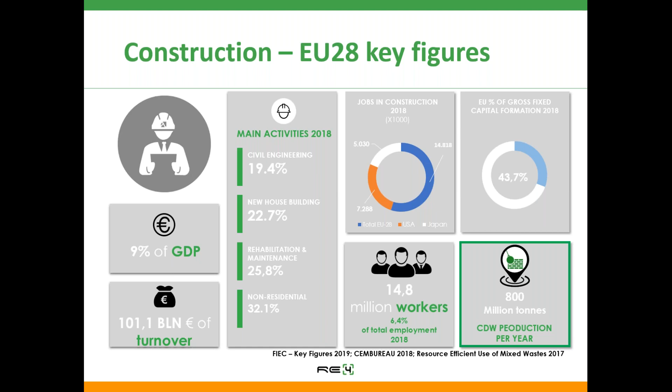However, construction industry is also responsible for the main waste streams at the European level, which is construction demolition waste, which account for more or less 800 million tons per year. The interesting point is that quite a lot of those construction demolition waste can be recycled in high-grade application, but they are very often confined to low-grade application or landfilled. Moreover, there are other materials from construction demolition waste, which are wood, plastics, and glass, with a very high recycling potential that is, however, unexploited so far.

That's why in this scenario, Europe has set the challenge of the development of energy-efficient building concept using new or adapted prefabricated components, allowing the reuse and the recycling of different materials and structure while reducing energy use and minimizing environmental impacts. And Europe also set the targets of a minimum share of recycled materials in the final product of at least 10 to 15%.

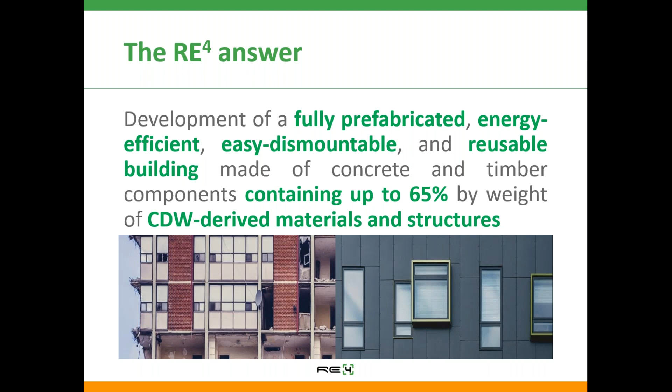And this challenge was taken up by the RE4 project, which has developed a fully prefabricated, energy-efficient, easy dismountable and reusable building made of concrete and timber components containing up to 65% by weight of CDW-derived material and structures.

And to reach this goal, we gathered a multidisciplinary consortium coordinated by CETMA and made of 13 partners from 7 different countries across Europe and 1 non-EU country, comprising 5 among university and research centers, 7 industrial partners, and 1 association. The project has an overall budget of about 5 million euros, and it started in September 2016, and it will end in February 2020.

While moving on the RE4 concept, there are 4 main pillars supporting the project. The first 2 are technical and refer to the maximization of CDW recycling and reuse.

In terms of recycling, RE4 has developed advanced CDW sorting technologies to improve the overall quality of the CDW-derived products, as one of the main constraints for growth is the quality, which is not always good enough when compared to virgin materials. At the same time, RE4 has also fully exploited the recycled potential of lightweight fraction from construction demolition waste, which is currently unexploited.

This process has been supported by the compliance assessment of each sorted fraction against relevant national and European specifications, with the definition of new quality classes for CDW-derived aggregates, with the aim to support the development of new standards in the fields of construction demolition waste.

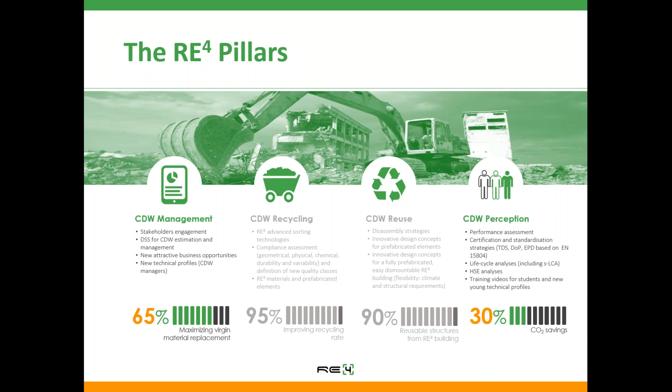Well, let's now see a brief overview of the main results obtained so far by the project, and to each result we have devoted specific presentation both today or in the forthcoming webinar sessions.

So is it possible to build a fully recycled house? The RE4 project answered yes. Nevertheless, it is crucial to adopt a circular approach and to address all the main steps of the construction process.

That's why the RE4 project has developed solutions in terms of design for reusable buildings, construction strategies, CDW sorting, CDW quality assessment, development of materials and prefabricated components incorporating a high ratio of CDW, and a digital tool to support all the actors of the CDW management.

All of the RE4 solutions have been demonstrated and validated in real environments in 4 RE4 demo buildings. Here you can see in the right picture the Spanish RE4 demo building, a 2-story building made of prefabricated concrete and timber components, fully reusable with a replacement rate of virgin materials in the range of 50 to 85%.

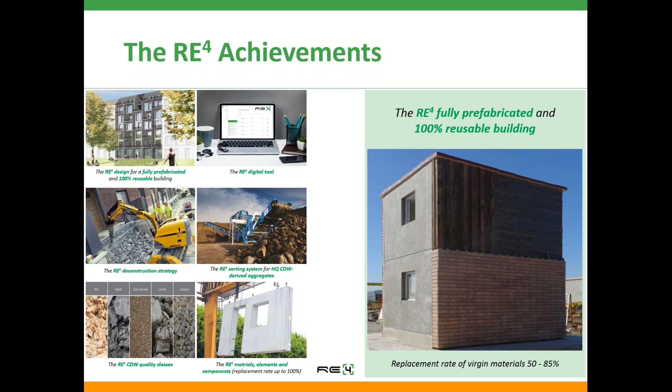In terms of figures, the RE4 project has developed a set of statistics, both lessons learned and recommendations in terms of CDW management, 4 new technologies in terms of deconstruction, sorting, design, and digital management, 6 new solutions at the material level in terms of new quality classes for CDW derived aggregates, 5 new materials incorporating on average 78% of CDW, 8 new components, both structural and non-structural, incorporating on average 82% of CDW, and 4 demo buildings, 2 for new construction and 2 for renovation.

We have also tried, and we are trying to share as much as possible these results, as we know that the transition from a linear to a circular economy in construction has to be promoted at all the levels of the CDW management value chain.

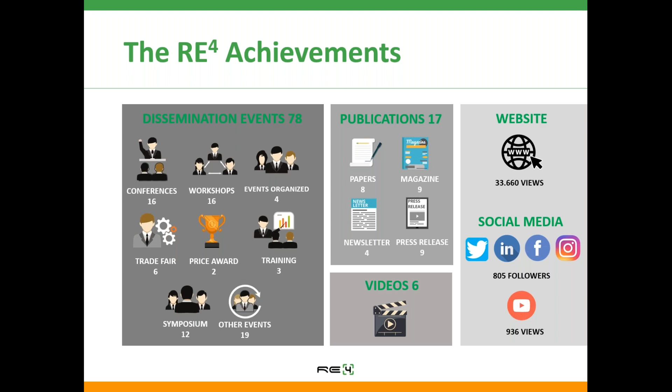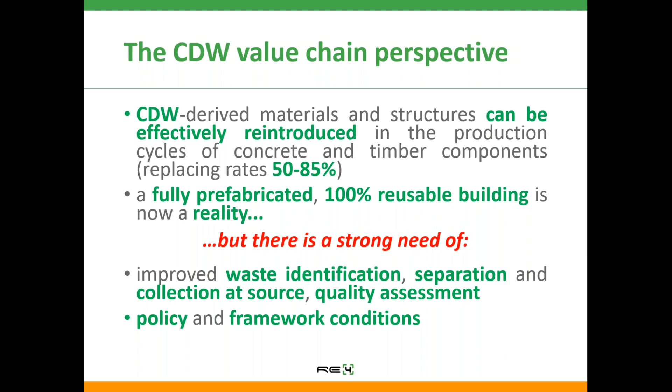To conclude, the RE4 project has demonstrated how CDW derived materials can be effectively reintroduced in the production cycles of concrete and timber components with a replacement rate in the range of 50 to 85%. Moreover, from a technical point of view, a fully prefabricated 100% reusable building is now a reality. Well, the way is paved, but there is still a strong need of improved waste identification, separation and collection at source, quality assessment procedures, and mainly policy and framework conditions that can foster the transition to a circular economy in construction. Well, thank you very much, and I'll be happy to reply to any question during the question time.

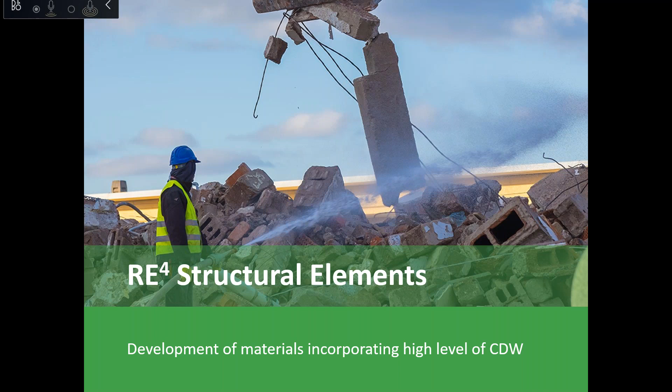Finally, we had to demonstrate the RE4 structural elements at the industrial scale, and all elements were produced here at Creagh facilities. Moving on to the development of materials incorporating high levels of CDW. All structural elements are made of reinforced concrete, so the focus of the materials went to the concrete development. This was already discussed, and here I just want to show you the mixes used at industrial scale.

These mixes contain CDW aggregates, cement, limestone fillers. On the structural elements, we used three mixes: one self-compacting concrete, another one a semi-dry concrete, and vibrated concrete. The vibrated concrete was to be used in the stairs manufacturing.

So what were the major challenges when using CDW aggregates? One of the biggest challenges in concrete manufacturing is related to the consistency of supply of raw materials. Contamination can be another problem, and quality assurance, that is, whether the materials supplied or received meet the initial criteria we have. So after careful analysis and based on Creagh's experience dealing with aggregates from different sources, a method for receiving, storing, and handling the CDW aggregates was developed in the project.

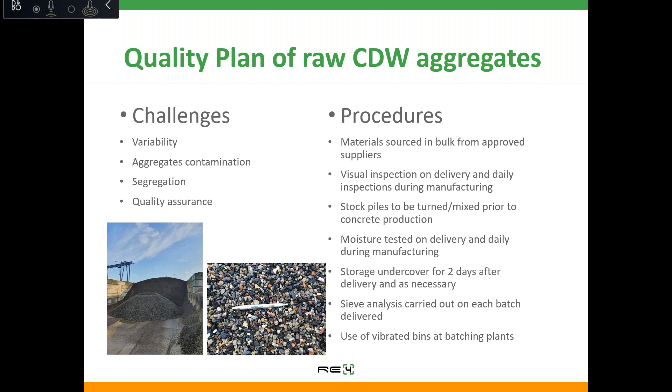Now, moving on to the development of the structural prefabricated elements. So I just want to take some time to talk about the design, because many times this is neglected, but a lot of effort went into designing the structural elements during the RE4 project. After a long and extended period of discussions with all partners, we came up with two structural systems.

One is a frame precast system based on columns and beams, which is a more typical system for seismic regions. This system uses a non-load bearing sandwich panel on the perimeter, fixed to the frame structure. This building can be completely dismantled and reused. So we made sure to develop good connections for the elements, for easy construction and easy disassembly of the elements. This precast system is adequate for new multi-story buildings.

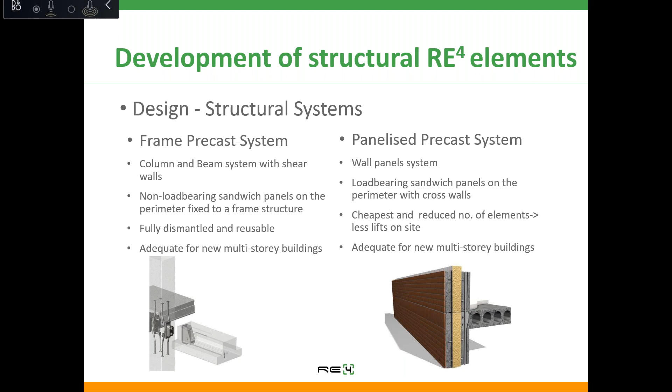This will be discussed in a bit more detail in the next webinar when we're going to talk about the demo buildings. But basically, we developed a frame precast system to show in the demo building in Spain, and the panelized precast system is being shown here in the UK. At that time I'll talk more about the types of connections used in both demos.

The frame precast system uses bolted connections. These connections were off-the-shelf products, and we worked especially with one supplier, Peikko, and they have bolted connections for wall-to-wall connections, columns to columns, columns to beams, and so on.

The panelized precast system uses a different connection system. To connect wall panels to wall panels, it mainly uses a wire loop connection with a rebar going through the loops, which is grouted. It's a shear key, as you can see in the pictures on the right. This system also uses blocks, pipes inside the wall panels, where the rebar can be placed to make a continuous joint that links the whole precast elements together.

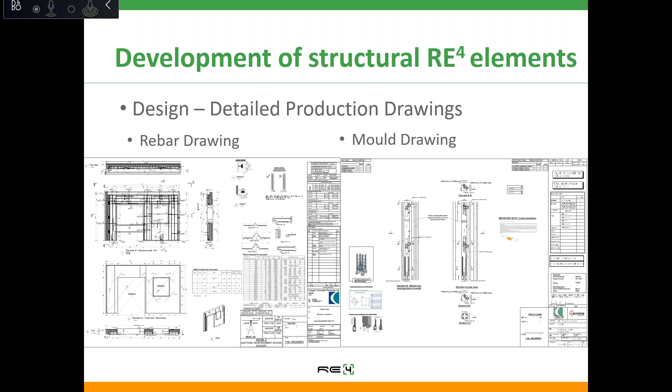So in total, we produced a lot of elements: structural RC wall panels, 6 beams, 3 columns, 5 solid floor slabs, 49 hollow core reinforced concrete slabs, 16 load-bearing sandwich panels, and 4 stairs. These are only the structural RE4 elements produced. More non-structural elements were produced as well.

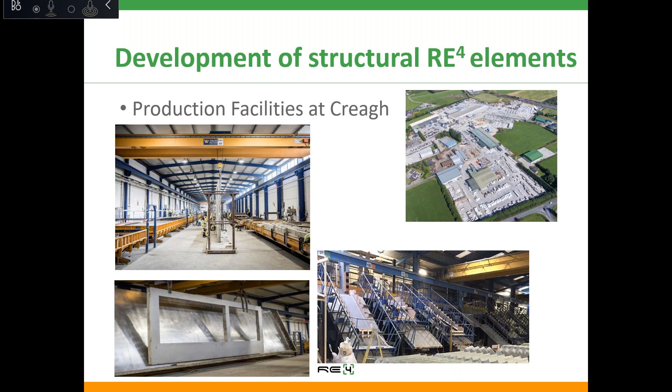On the right, at the bottom, you can see the stairs factory. As opposed to the normal tables, they are inclined at an angle, so the stairs can be at the right position. They can be adjusted, but they are heated as well.

So stepping on to the production process, we can divide the standard reinforced concrete elements production into 6 main steps. Firstly we have the steel reinforcement, then the mold preparation with timber and plywood, which is fixed to the steel molds shown before. And then we have the concrete manufacturing process. All the concretes are done here on site at different batching plants.

Then once we have the concrete, we can pour the molds in the factories, and once the molds are cast, there's a curing stage and a finishing stage where the elements are left to cure and the concrete to gain enough strength so it can be demolded and lifted. And there you have an RC element produced. Now I'm going to go in more detail into each step and show you pictures of the manufacturing process.

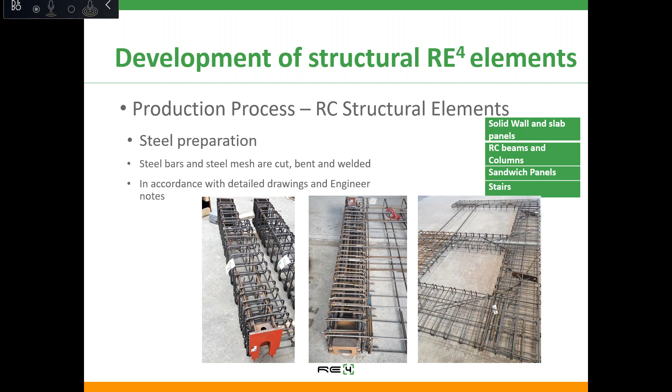The second step is the mold preparation in the factories. Most of the precast panels are bespoke products, and individual molds are prepared for different designs. The base of the mold is a heated tilting vibrating steel table, as I mentioned before. This base can be referred to as the panel's face, and is usually taken as the surface of the element that requires the best possible finish. It's usually taken as the exposed face.

Each mold is prepared by setting the wooden shutters against the steel base to form work with the shape of the element. The mold is cleaned from debris, release oil is applied, and the reinforcement is set up with appropriate cover spacers. All features are placed: lifters, connections, fixings, M&E pipes, and so on. You can see there in the pictures some of the molds prepared. On the left we have molds for wall panels.

On the right on top we have the molds prepared for the stairs, cast against the ramps in the stair factory. Beams and columns on the right, and more wall panels with the reinforcement already placed into the molds.

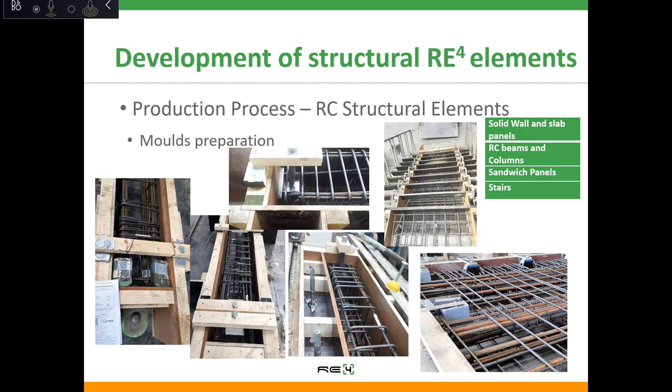The stair mold ready with the steel reinforcement ready to be placed, and on the right at the bottom you can see a wall panel from the RE4 project with all the connections and steel reinforcement in place and ready to receive the concrete.

So as mentioned, the next step is the concrete pouring. All concretes are produced at an on-site automated batching plant. In this batching plant, the quantities are controlled by a computer and measured automatically after the concrete mix design is introduced into the computer. Then the concrete is transported to the factory using a truck, a lorry, as they call it in the UK. At arrival at the factory, a sample is taken, and the slump flow test is performed.

From this sample, also specimens are taken for later compressive strength testing. If the slump or flow is approved, the concrete is discharged into a 2 cubic meter skip, which is used to pour the concrete into the molds.

There's vibration on the tilting tables if it's required. Usually it is not, because for the horizontal panels and columns and beams, we use the self-compacting mix developed during the RE4 project, and we're happy with that. So we didn't use vibration at all when casting these elements. As you can see in the pictures, the concrete is very flowable.

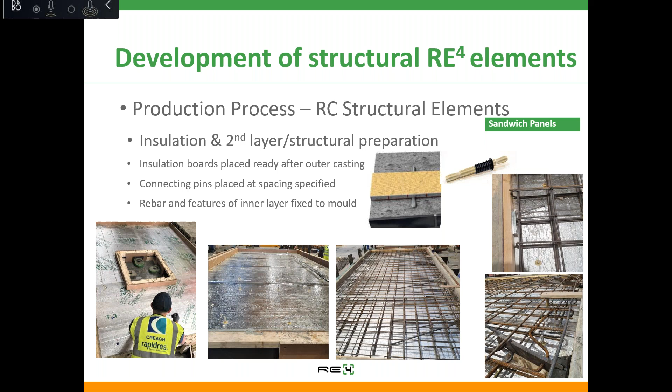And at the bottom, you can see pictures of how it looks when manufacturing these panels, and on the right some details of the positioning of the lifters and connections. Then the second layer of the sandwich panels is cast in a similar way as I explained before. We get the concrete from the batching plant and using the skip, the structural layer is poured.

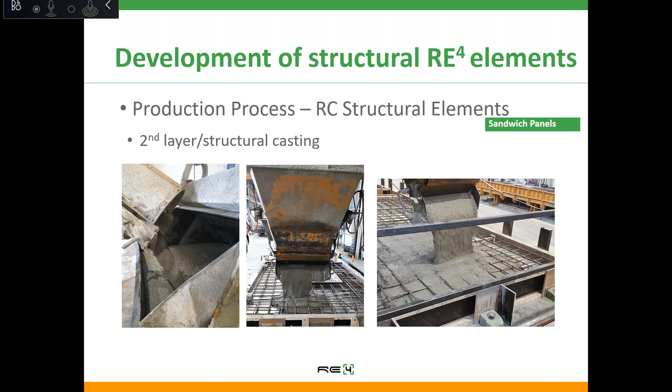After all the casting of the concrete elements, and as soon as the concrete begins to harden and the consistency of the surface is adequate, these elements are manually or mechanically trowelled depending on the level of finish required.

The panels then are left to cure in the factory on the heated tables for approximately 16 hours before the next stage. We try to keep the bed at 20 to 25 degrees, which we found is the most accurate temperature to cure the concrete and achieve the requirement of 15 megapascals for lifting.

You can see there are some pictures of the guys finishing the wall panels and sandwich panels on site, and on the right you can see one of the beams already cast in the mold.

Okay, the next stage of the production process is demolding and lifting. When the concrete reaches 15 megapascals, we can lift the panels. The strength of concrete is tested by testing two cube specimens, and if the strength is above 15 megapascals, then the panel or the element is demolded, lifted, and transported to the adjacent area.

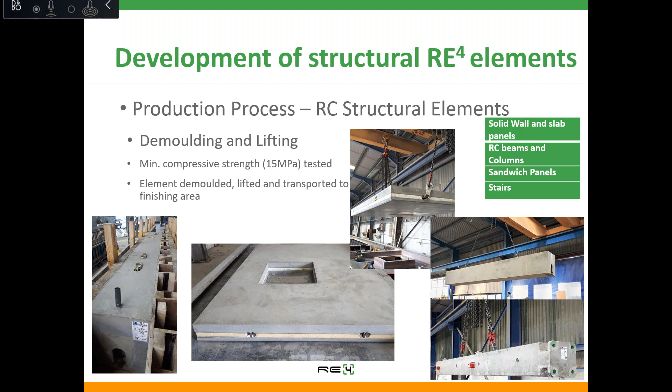Ruben, I'm sorry for interrupting, but we are running out of time, and I would like to ask you to finish in 2 minutes. All right, okay. I'll try to speed up. Okay.

So the next stage is final finish and quality checking, where all the panels are checked for any defects and any finishings are applied if required. Now, to try to speed up,

I want to discuss a little bit of the Homespan, which are hollow core RC slabs, produced using a semi-dry mix developed during the RE4 project. This factory is fully automatic, and we produce this as a standard product. You can see there we have steel molds, and the rebar is placed similarly to what we've seen before. And there are steel pipes that slide along the molds that form the hollow sections.

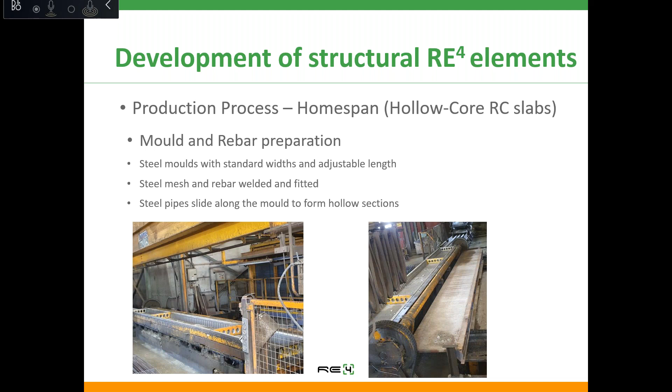Then the casting is done by a fully automated batching plant inside the factory. It's the only one we have here on site. And there's an automated discharge system that pours the concrete directly into the mold. This mold vibrates and then automatically turns and demolds the fresh slab into a rack. This is only possible using a semi-dry mix.

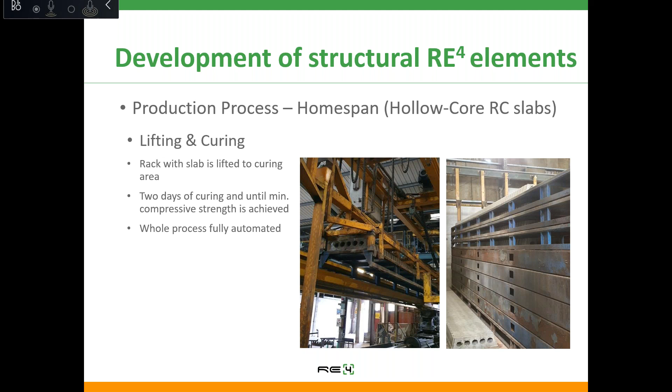Then, similar to the other elements, the slabs are lifted and placed in an area to cure. Once they are cured, normally after 2 days, they are pushed into a conveying system to be stored outside. The slabs are inspected before being stored, then lifted and stored until they are ready to go to site.

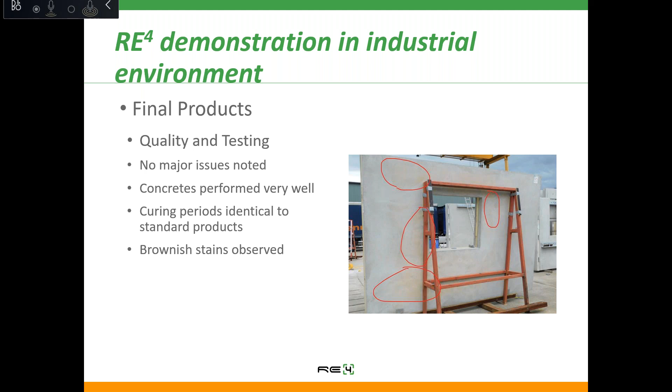During the production, as I said, everything went smoothly, just small issues and some details of the connections, but that was adjusted as required, and no non-conformities were noted during the manufacturing process. We just noticed some brownish stains on some of the panels, probably due to the high content of clay in the sands or the aggregates.

And finally, we have the final products of RE4, which were used in the demo sites. We have wall panels, solid slabs, hollow core slabs, columns, and beams. All elements were produced here at CREAGH. The RE4 elements are comparable to standard concrete precast products, and here at CREAGH we were very happy with this project, and we are using the elements for our new concrete lab, which is being installed as we speak.

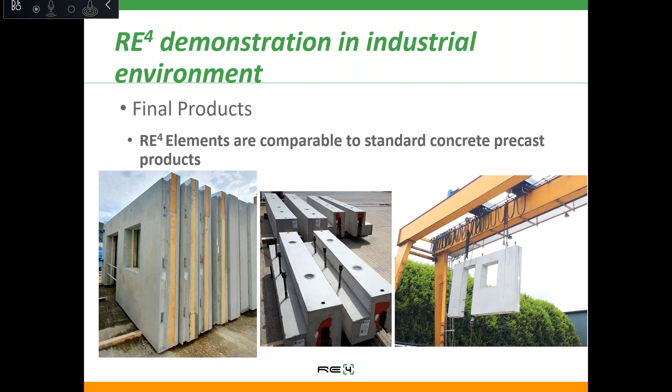And here we can see sandwich panels, big sandwich panels, 8 tons. Some of the panels were manufactured using the RE4 technology, columns and beams, and a wall panel that was sent to Spain. They are hanging on the crane.

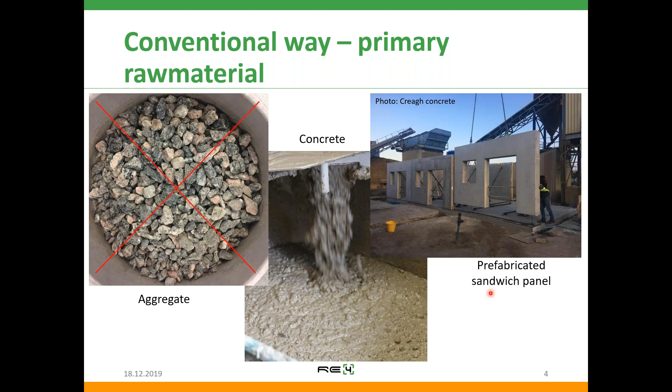Usually we don't fully replace the aggregate with CDW. Usually we have a range, so that's why this primary aggregate still peeps up behind it here.

So, I'm going to show a rough layout of a conventional panel. This is how it looks, a little bit simplified, with inner and outer layer surrounding insulation, and having a conventional self-compacting concrete, which is steel reinforced, just like Ruben showed in these nice photos from the CREAGH factory.

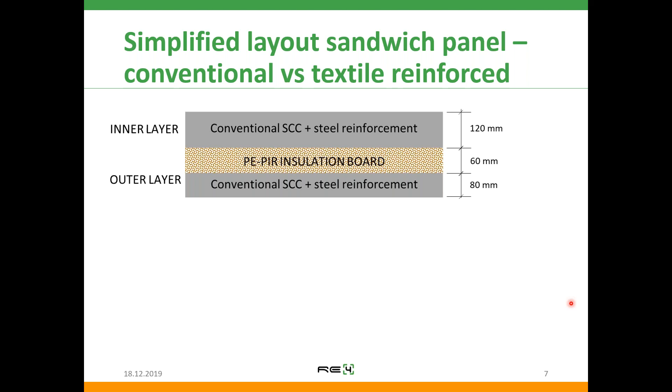So, to say something about how you actually achieve this - because this is of course the end result of what we have achieved in upscaling, but it has of course been some work to get there. We started actually on industrial scale.

By the partner I mentioned, CDE, who provided the CDW. Then, of course, there's some work in the laboratory where you need to characterize and quality assess the CDW using it as concrete aggregate. Then you, of course, need to adjust your mix design for your concrete mixes with replacement of CDW.

And in our case, we have also, before going to upscaling at CREAGH, wanted to test different textile reinforcements to be in the outer layer, to decide which type of reinforcement to go for. So this is actually what I'm going to focus on in my presentation, the laboratory work in between these industrial scale works.

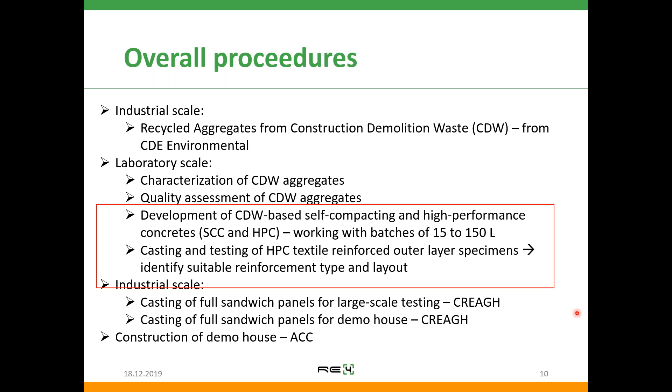So starting with the concrete, I will not mention so much about aggregate characterization and assessment, because that will also be an issue of a later webinar. So, after your characterization, you have your CDW, you know how its properties compare to virgin materials.

We use this line of work to adapt and optimize mixes, both for self-compacting concrete and for high-performance concrete, starting with screening tests on small batches, like 15 liters, to look at workability and short time properties, like compressive strength after 1 day and 7 days.

As Ruben mentioned, they need, for example, some early strength development in order to demold and work with the elements as soon as possible after casting.

And in this way, we can vary a lot of different properties, like the primary aggregates, replacement level of CDW, different cement content, and so on, in a relatively short time to really optimize, get as high as possible CDW replacement and still fulfill the industrial partner requirements.

Because, of course, as Ruben mentioned, Creagh Concrete, in order to use this, they have properties they want to be fulfilled. So, after screening tests, identifying some candidates, you could go for a more full-scale test program on larger batches and also look at a lot of other properties, including durability properties.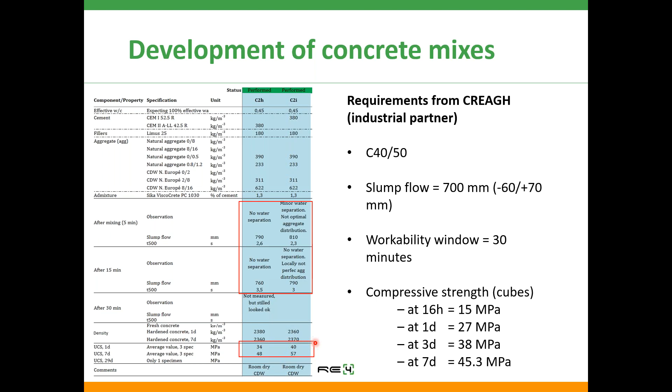The previous slide was actually a few examples of self-compacting concrete. We also ran screening tests for high-performance concrete mixes. And here you see it's the same properties that CREAGH wants this mix to achieve.

But here you also see something happening depending on the CDW source, the one we call SE. In that one, we succeeded to replace 90% of the aggregates while fulfilling the properties CREAGH requested. When changing to another CDW, which we shortened to UK, we only succeeded to replace 50% while fulfilling the requirements.

The reason for this is that these two different CDWs have different quality. This will be an issue for a later webinar, but shortly, the quality class of concrete as used in CDW is stipulated in the EN standard for concrete, EN 206, with two different classes, A and B, where A is the better one. The more concrete and unbound stone you have, the higher the quality, and with more bricks, tiles and bituminous material, that generally lowers quality.

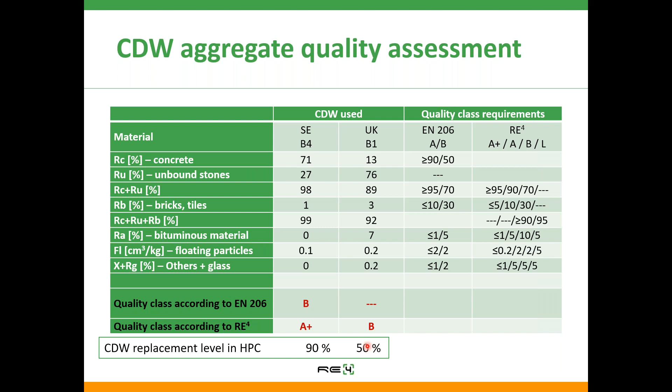So the next step for us, when we had developed self-compacting concrete and a high-performance concrete that we were satisfied with, was that before upscaling at CREAGH, we wanted to test which type of textile reinforcement to use in the outer panel. So we set up a test scheme where we produced test specimens using much smaller molds than they did at CREAGH for flexural strength test, and also pull-out strength for these anchors, these pin connectors.

We used two different textile reinforcements, alkali-resistant glass fiber and carbon fiber. With carbon fiber, we tested with 1 or 2 layers. In total, we tested 42 specimens. Here you see how it looks.

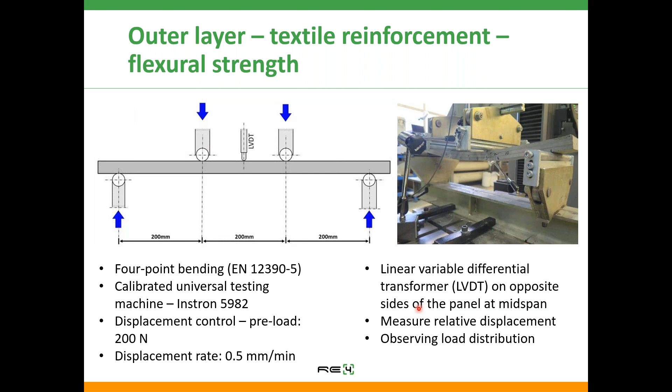This is 4-point flexural strength, also measuring the displacement. The pull-out test - here you test how much strength you need to pull out a connector, and then you assess the damage done.

From these 42 test specimens and these 2 tests conducted, our conclusion was that we should go for a 40mm thick outer layer as shown previously, and 1 layer of carbon textile reinforcement. So this is what we could provide to CREAGH for their upscaling.

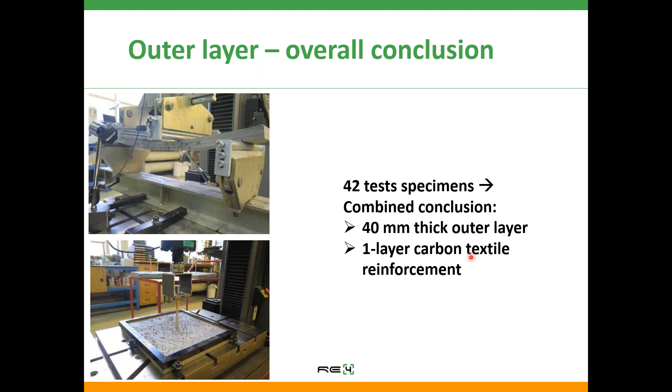Ruben has already shown pictures from the upscaling work, and the first step in the upscaling was that they used the mixes that we developed, and they made some adjustments. The interesting thing was that even though they used another type of cement, another type of primary aggregate, other fillers, other admixtures, the only thing they needed to adjust was the amount and type of superplasticizer a bit. They used the same CDW because CDE delivered CDW from the same batch to us and to CREAGH. So this was really interesting.

So this is actually the 3 large elements from the first upscaling test elements, and this is part of the crew at RISE who has helped me, or to be honest, they have done the work. I just sit there.

With these elements in 4-point bending strength, once again to confirm that it was the right choice to use 1 layer of carbon fiber in the outer layer, because one of these 3 panels had 2 layers of carbon fiber in the outer layer. The results from this 4-point bending strength test, surveyed by digital image correlation, showed that 1 layer proved to be the best one.

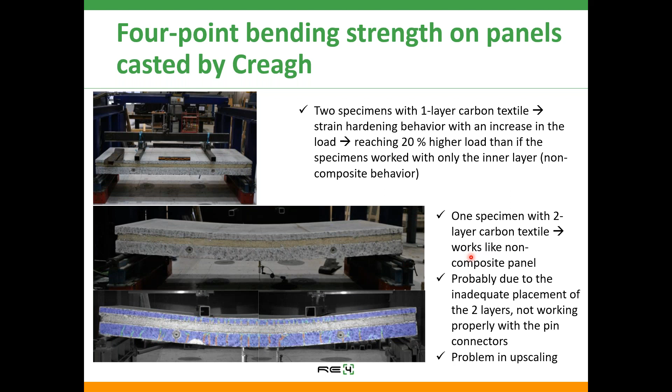So to conclude, before going to upscaling, there's some need of adjustments. But if you have done good structural work to investigate how different changes of material affect your concrete mix, it doesn't need to be so big to replace virgin or primary aggregates with secondary ones like these recycled CDW.

The challenge with these aggregates is typically the water absorption that is a bit higher than what we are used to in Sweden, where we often have very low water absorption values. But that can actually be assessed in the right way, for example by pre-saturation or surveying how much water this contains, and then calculating with it when you proportion your concrete and count how much water you need. It doesn't need to be such a big issue.

We also noticed that when using a CDW of a little bit lower quality, we had to reduce our ambitions on replacement. That is also interesting, that it's actually confirmed - this is a confirmation of this quality assessment system.

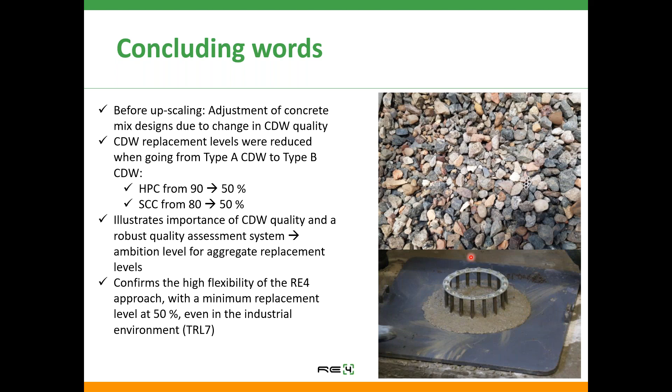We also noticed, except in this first upscaling in industrial environment, that it's quite hard to work with textile reinforcement, because you pour large batches of concrete on these small nets. Particularly with 2 layers, it was a bit hard to keep them in place, so the choice to go for 1 layer was very good for us.

To conclude, overall this was very successful. We are very happy, and we're happy that the transition from laboratory scale to industry scale by CREAGH was so smooth, in a very happy and friendly way. We hope for more work like this. Thank you, and looking forward to your questions later in the question time.

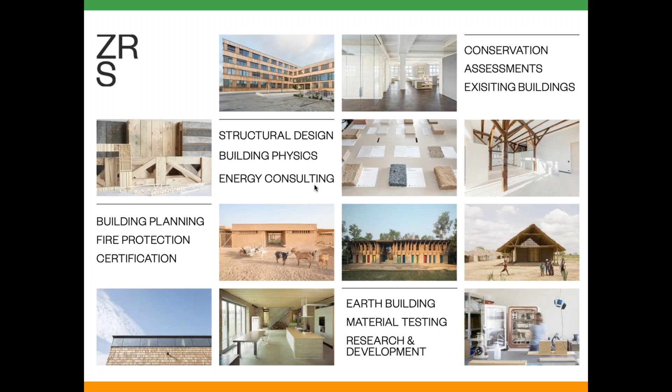Maybe just a few words about our practice. As Susanna explained, we're a firm of architects and engineers working very closely together. We do a lot of projects in Germany, but also abroad, and the main focus of our work is constructing with natural building materials. We use a lot of timber, but also earthen materials, and sometimes we have the opportunity to do experimental work with bamboo. What might be quite special, and what helped a lot in the current project, is that we have our own office lab where we can test materials.

The reason why we work with timber is that we believe there are a lot of opportunities, first of all in regards to circular construction. It's a very suitable material for circular construction, as it's possible to construct dry and reversible connections, which is very important to make a building or an element reversible. It's a very light material, which helps reversibility. It stores CO2. We have short construction times because full prefabrication is possible. It's a good thermal insulator, so you can achieve high quality thermal insulation through the material itself. As architects, we also look into occupants' comfort and health, and low-tech construction, and timber is a very good material for these goals.

The challenge in the project we were facing is that reuse and recycling of timber is not really established. We found out very quickly that there's no infrastructure in place. We had project partners responsible for sorting different waste streams, and the timber materials we received basically consisted of fibers that were often moldy, so we weren't really able to construct any structural elements out of that kind of material. This made us aware of the situation, and we dug into this material sourcing a little bit more.

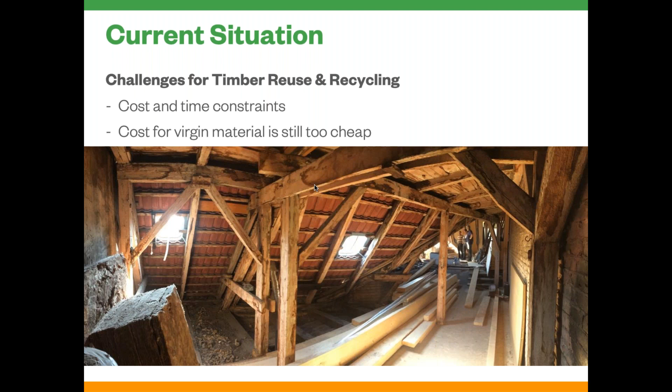What we found was that due to cost and time constraints, and the fact that virgin material is still very cheap, timber is not really recycled and reused very much. The main challenge with recycling and reusing timber is that you have to classify it according to waste wood categories. There are 4 different categories plus PCB waste wood, which is timber you can't really bring back into the cycle. What happens on site very often is that the construction manager doesn't want to take time to investigate the timber, so by default they classify the waste wood into category A4, and in that respect the timber can only be burned and can't be reused or recycled.

Other challenges that we were facing is that very often modern timber constructions are based on metal fittings, and manufacturers are very much afraid that metal impurities could further down the line damage their machinery park. So again, this is one of the main barriers why there is no infrastructure in place to recycle and to reuse the timber.

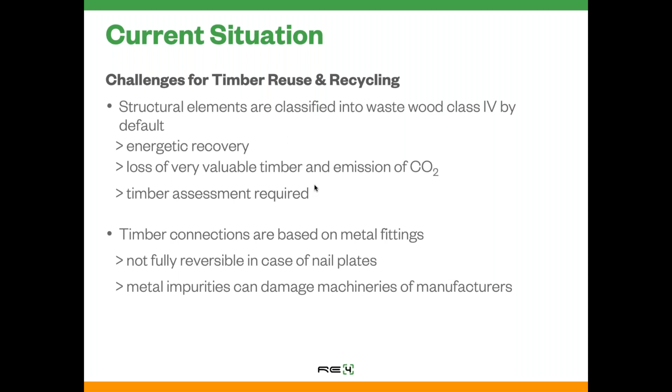One of our hypotheses is that at the moment we lose a lot of valuable material, because there would be a lot of opportunities to take advantage of the dismantling of buildings where you have timber elements, because the quality of the timber, we believe, is often better if it's really historic timber, because it grew during different environmental conditions in comparison to timber now. And it had higher or better drying time. So we believe the quality of historic timber is actually very, very good.

So we approached the construction manager and asked for the material for the RE4 project, if we could use it. We did obviously all the testing that was required regarding the appliance of wood preservatives, which is quite important. And we managed to reuse this timber.

But just to show you a few other sources for waste wood. When we look into historic constructions, we have a lot of wood in the structural system, as wooden beams, columns, or in the roof. Certain buildings are also constructed with timber facade elements, or we have timber in partition walls.

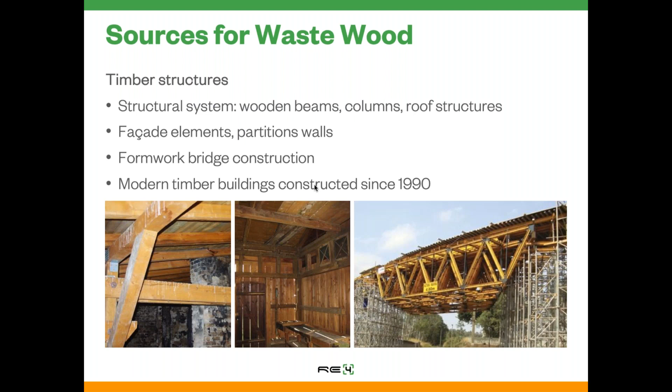There's a lot of construction work going on where timber is used as formwork. This is what you can see on the right-hand picture. And this is just used for 2-3 months until the construction, in this case it's a bridge, is fully carried out, and then afterwards it gets burned. So again, these are really suitable sources where we can use timber for recycling and reuse.

Just a few prerequisites that we're facing. I mentioned briefly wood preservatives is an issue. You have to classify the timber, and if, for instance, a wood preservative is applied that you can't use nowadays, you have to react to this fact. But I will explain in a minute how this is possible. Then we need to make sure that the timber doesn't contain any other pollutants that might come from the previous use in a building. That happens from time to time as well.

Wood destroying fungi or insects are obviously an issue. But again, there are laws in place how to deal with this. If you have, for instance, a timber column which has been infested, you just cut off the infested parts plus an additional defined length of timber in order to make sure that the timber that you can recycle or reuse is free of such negative impacts.

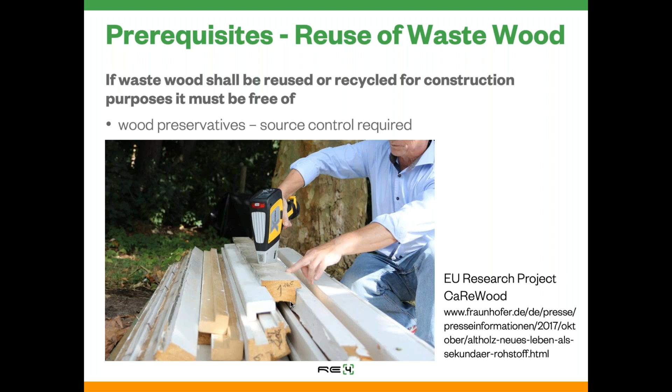But during the research project, we came across another research project carried out by the Fraunhofer Institute, and they developed this hand tool that you can see in the picture, where they are able to identify appliance of harmful substances. And this is obviously very handy, because if you could use such a machine on site, you just run through and you can on site already separate treated timber from not treated timber.

Just to show you a little bit the process that we were going through, because also we have to assess the quality of the material. So in this case, we took the material out of a historic attic in Berlin. We cut lamellas to a certain defined size that we defined as architects.

We took metal fittings out. In this case, it was a bit more work. We investigated damages, cracks, but also branches, the dimension, the location, the depth, and so on, which is very important in order to assess the quality of the timber. And this is done then actually at industrial scale. It's done automatically. In this project, we had to do it manually, which is again a bit more time consuming, but normally this process takes place really at industrial scale.

So for the different lamellas, you have a different sorting class, where you apply this to a certain standard. It's according to DIN 4074, and you have to assess branches, you have to assess annual rings, you have to assess cracks, and then you specify a specific sorting class.

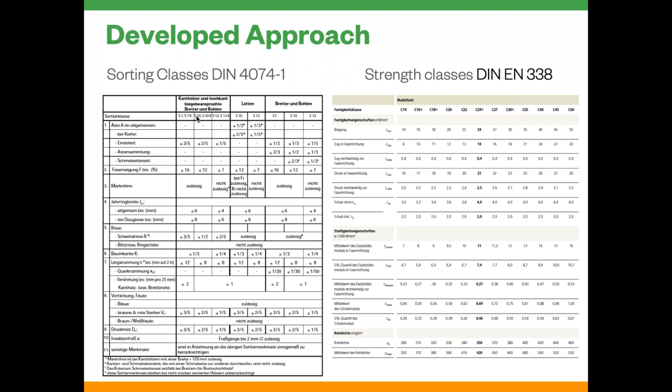And on this basis, then obviously you develop your structural elements like beams and columns. And again, these are assessed according to standard again, and you specify the element itself according to a certain strength class, which again for the final construction is very important.

For the design concept of the facade element, we came up with different indicators in order to set us ambitious goals. We specified the element as a non-load bearing facade element, because we believe that for circular construction, if you look at the entire building level, it is very important that you come up with a system where you can dismantle the facades quite easily, because the facade itself has a different lifespan in comparison to a structural system, for instance, which is much more durable and should stand up for much longer time.

We also wanted to design a rear ventilated vapor open facade element. Rear ventilation is more expensive, but it has advantages in regards to durability, because the air layer protects the entire construction from moisture. And the vapor open aspect is very important when you want to design a building and you want to minimize mechanical ventilation.

The other topics that we were looking into: full reversibility through removable connections. As I explained earlier, in timber construction, it's very easy to achieve, because we can use screwed connections, and we can also use carpenter connections. These are dry connections plugged in, so you don't need any metal fitting for this.

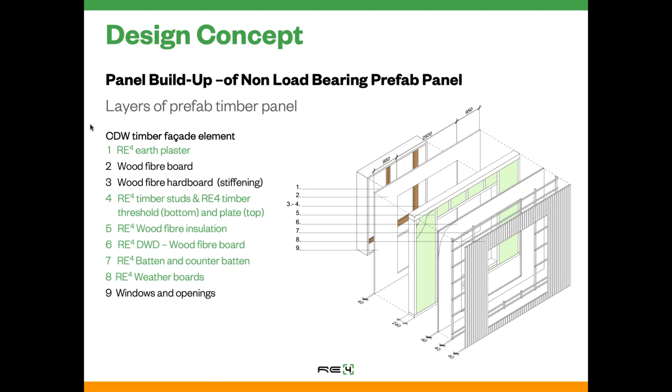The advantage of timber construction is that you can place your window openings already inside the facade element. We haven't done this in this project, but in theory it's possible, and manufacturers are doing this already. And in timber construction, it's very easy to place your window. You have a lot of freedom as an architect with the facade design.

Another topic that we were following is the opportunity for the cascading use of timber in order to be mindful with the material and to be material efficient. Our idea was that we maximize the outcome of the structural members that are incoming, and maybe the cut-offs we could use as weatherboards, and any other chips that occur during the manufacturing process could be used for the production of chipboards or hardboards, and any other fibers then could go into the development of wood fiber insulation or wood fiber boards that you need for the entire facade build-up.

But the idea was also that, for instance, when you carry out maintenance on a facade element and the weather shell has been damaged, you could use these timber components, chip them into chipboards, and manufacture the next level of timber component out of it. So this is also something we carried out during the project.

The incoming sections we have to cut, because historic timber also used core wood. This is something in modern construction you try to avoid. Sometimes you have to cut out cracks. So for the timber studs of this facade element, we also developed components that are based on a framework in order to minimize the material usage. This shows a few different strategies that we applied in regards to the incoming sections.

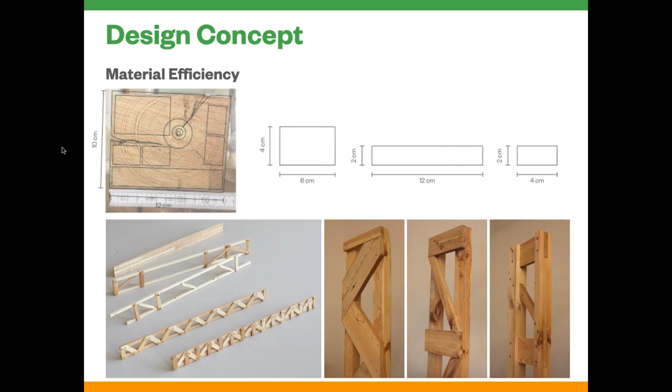Another important topic for modern construction is the avoidance of wood preservatives. This is possible. We have a standard in Germany that specifies a certain type of construction and makes sure that timber can dry out again, and if you fulfill the requirements of this standard, you don't have to apply wood preservatives, which for circular construction is obviously very, very important, because we try to avoid wood preservatives.

This shows the design of the timber facade element. Again, in this case, we changed the orientation of the weatherboard. This had to do with the demo site. We wanted to make use of the fact that we have exposed timber, and that we can assess whether the vertical boards differ significantly from the horizontally arranged boards.

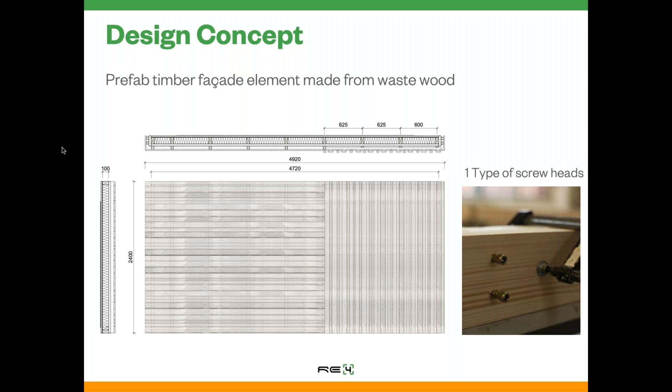Another topic is screwed connections. We aim to have only one type of screw head, because we figured out that it is quite time consuming if you have to change your heads again all the time during the assembly. So this was also one goal that we tried to achieve.

This shows you now the assembly process of the entire panel. The idea was that we would let a subcontractor carry this out, but during the course of the project it became obvious that it's very important for us as a learning curve that we do the entire process ourselves. But as we are architects, we don't have access to a machinery park, so we did it really with a few hand tools. On the first picture, you can see the assembly of the structural frame that you need as a self-supporting structure, with the studs and the horizontal members.

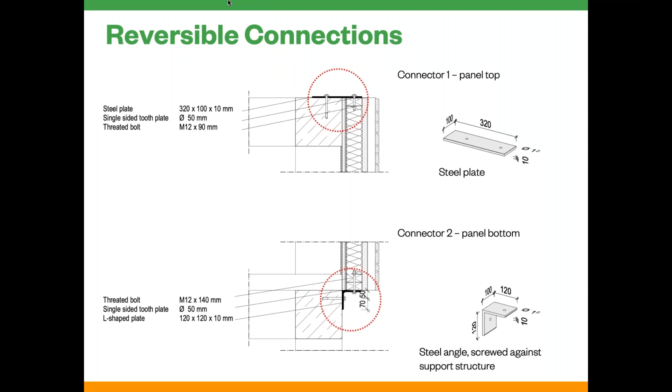So the building element itself is fully dismantleable when a building reaches the end of life. Also for the installation process, we looked into a very easy system of anchorage. You need a bit of support at the top, but these are simple screws that you can screw into your material, and you have these simple steel connectors that you can very easily and quickly apply.

This is showing the installation of the facade element in Madrid. Alessandro was showing another image in his presentation already. It's attached to the second floor level. They could have used only pieces for the steel angle. It's quite a robust construction in that sense. It could have been really short steel angles, and not the entire length of the panel would have been supported.

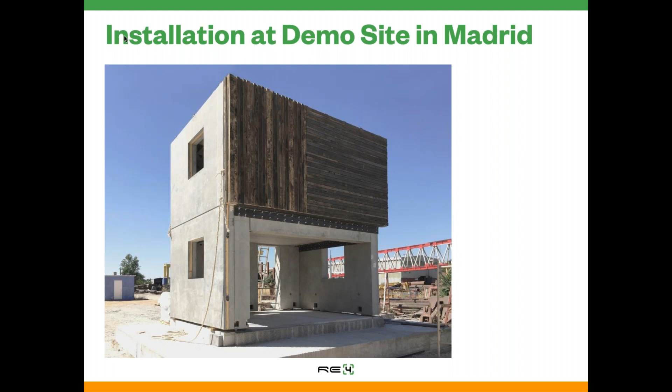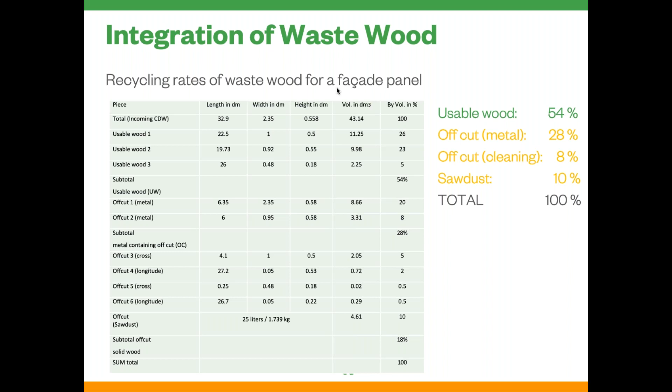So this is showing you a little bit the outcome. We have usable wood that is more than 50%, and then we have the offcuts, sawdust, where we believe you could also manufacture material out of it. But this is something that we have to prove outside of the project, because we couldn't investigate this as part of the RE4 project. Right, to conclude, in our elements that we manufactured, I showed you only the prefab timber element, but we were able to implement more than 95% of CDW timber, which we believe is quite a good achievement.

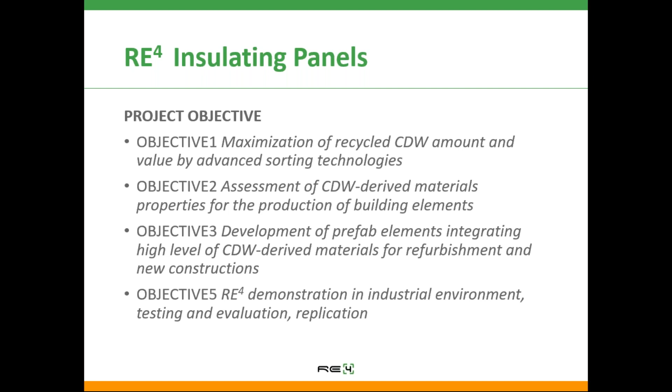I will talk to you about our activities related to the production of insulating panels realized with construction and demolition waste wood. Construction and demolition waste wood insulating panels are part of the project as elements that can help in achieving objectives 1, 2, 3, and 5 of the project, which are related to the maximization of recycled construction and demolition waste amount and value, the assessment of such materials' properties, the development of prefab elements, and finally the demonstration in an industrial environment. The different objectives will be discussed here.

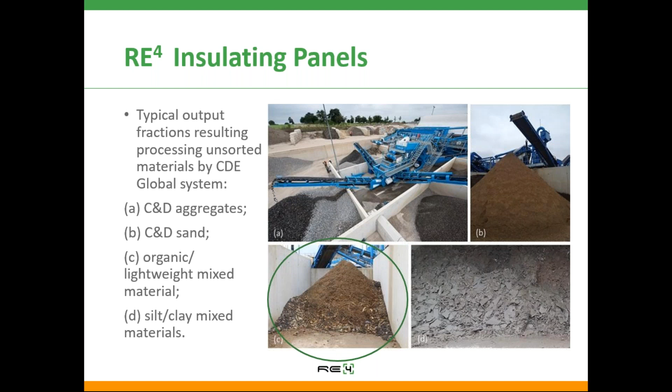Let's start with the first objective relating to the maximization of construction and demolition waste amount. Looking at the typical output fractions, construction and demolition waste insulating panels have been thought of as products from the organic lightweight mixed material fraction, which is normally a landfill disposal element. Such a fraction needs to be further selected in order to separate the different materials in it. In fact, it is normally composed of different materials such as plastics or wood. For insulating panels, wood has been chosen, even though attempts with rigid plastic were also made. In this way, a construction and demolition waste fraction of material normally not used has been recycled in a new product.

As far as the second objective of the project is concerned, the assessment of the construction and demolition waste derived materials, wood for the realization of insulating panels was tested in terms of physical performance. The analyzed material was recovered by a handmade selection in recycling plants from the lightweight fraction in order to have as few contaminants as possible.

First of all, the assessment was conducted in terms of geographical provenance. CETMA's request was wood in scraps with a dimension smaller than 10 centimeters in length, coming from two different regions, which were Southern Europe and Northern Europe. So two different batches of lightweight materials have been analyzed.

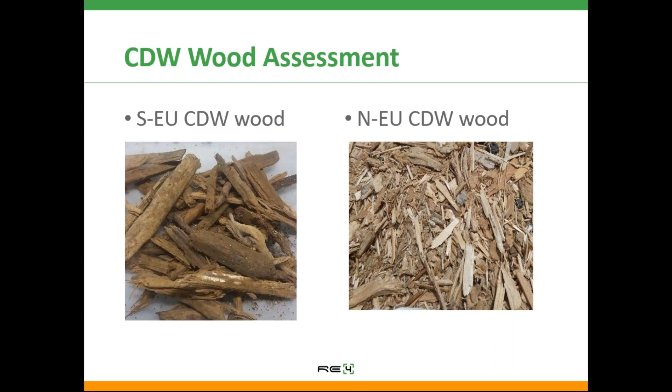In the figures, you can see samples of materials coming from the different regions. As it is possible to see, the scraps were physically different depending on the provenance. Scraps coming from South Europe were bigger but more homogeneous in dimensions than the material coming from North Europe. Moreover, wood from South Europe arrived as pieces of dimensions in the range between 100 and 200 millimeters. For this reason, a further grinding process was necessary in order to reduce the material to fibers.

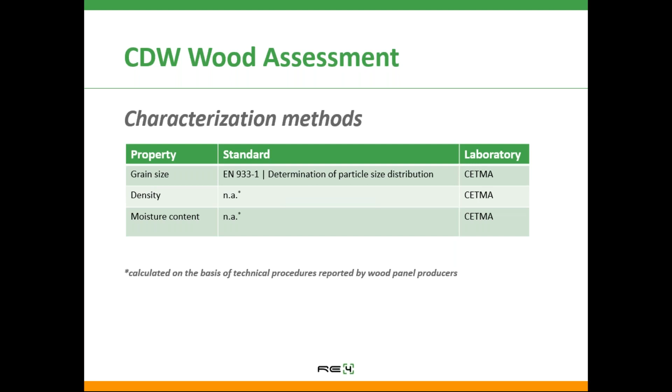Wood fraction has been characterized to define particle sizes. Two different characterizations have been carried out. The first one shown here, according to the methodology described in European Standard 933 Part 1, has been a one-dimensional sorting in order to determine the ratio of powder or near-powder size particles on the total amount of material. Moreover, first data on size distribution have been acquired. For each batch of wood fraction, 8-liter volumes have been tested with this method.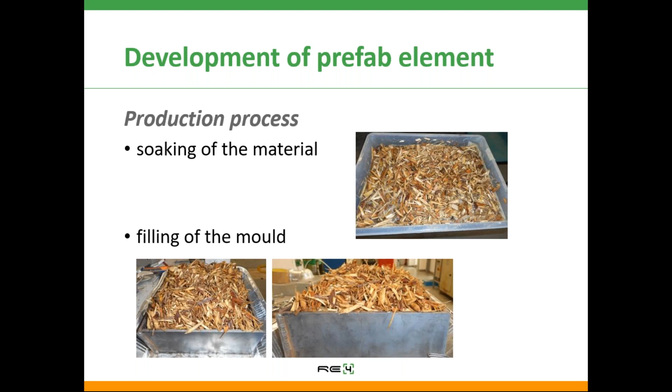Then the second step was the soaking of the material, reported in the picture in the upper part of this slide, and the selected material was soaked in water. Then there was the filling of the mold, as shown in the photos in the lower side of the slide. Soaked material was introduced in the mold after being roughly drained of the water. Depending on the quantity of material to be introduced, preliminary pressing steps were assessed in order to compact the materials. Then the material in the mold was kept under pressure and temperature in a hydraulic press.

The wood insulating panels production process was defined through 4 different parameters: the temperature, the time of the molding process under pressure, the mass of construction and demolition waste wood material, and the construction and demolition waste wood grading class and geographical origin. After this step, a cooling to room temperature step was realized, where the mold was removed from the press and then cooled down to room temperature. Finally, there was the demolding of the panel, where the panel was removed from the mold.

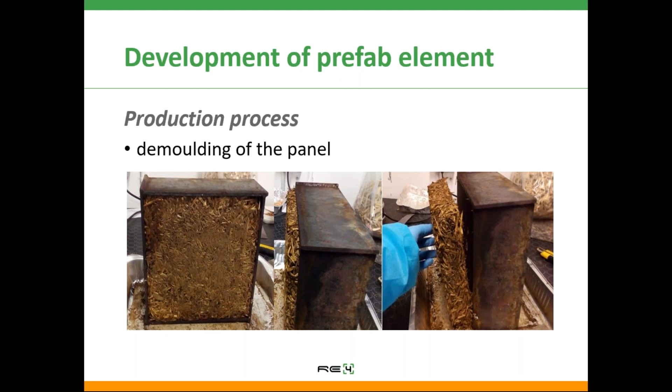When the insulating panel application requires fire resistant properties, a wood mineralization process can be realized in order to substitute part of the organic matter of wood fibers with mineral matter. In our work, the selected mineral was magnesium oxide, and different lab trials were conducted in order to develop the process.

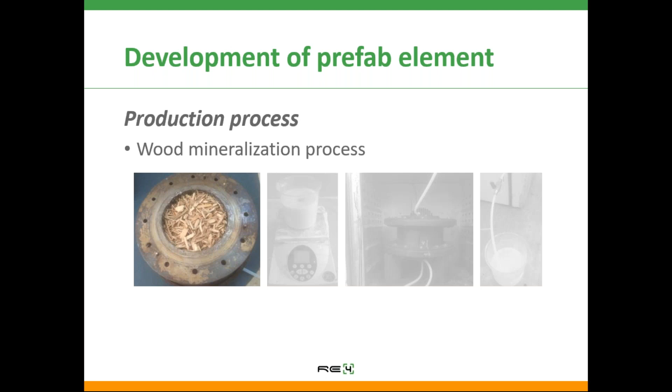The mineralization process was carried out before soaking the wood in water for the insulation panel production process. In detail, wood was kept in an autoclave under vacuum to obtain the degassing of wood fibers. Then the injection of mineral suspension in the autoclave was realized. The autoclave was pressurized in order to force the mineral solution to soak the wood fibers, and then the mineral suspension was removed and the autoclave depressurized.

The figures in the red rectangle on the left show representative wood fibers soaked in water before and after the mineralization treatment. The observed treated fibers are covered by mineral parts. On the right, the thermographs detected by Mettler Toledo equipment of 4 different samples are reported. An interesting result can be observed at about 500 Celsius degrees, where no residuals are observed for untreated wood fiber, while a residual of approximately 10% of mass with respect to the initial treated wood mass is observed.

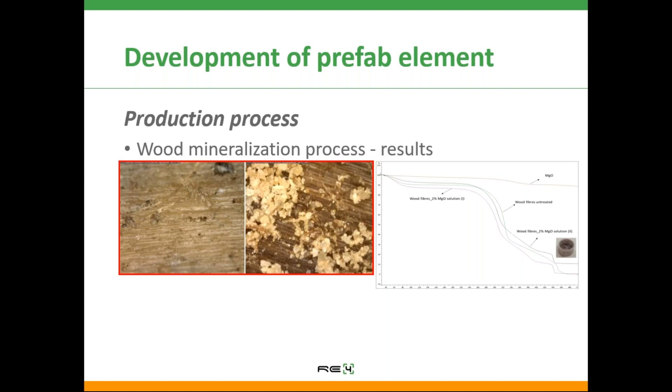The last objective followed with the panel's development was feasibility in an industrial environment. In order to develop a pilot production line, a new mold, which could be opened and stacked, was designed and realized. Then the number of panels necessary for the realization of the demo building was produced. And finally, the panels were shipped to the demo building sites and installed.

I thank you for your attention, and I will be very happy to answer your questions if there are any.

My presentation deals with the extruded concrete tiles developed within the RE4 project, and I will spend a few words just to introduce the company I work for, Vortex Hydra. Then we will go through the overall goals Vortex Hydra has been charged with, a list of the main obtained results, and a few concluding words.

Vortex Hydra was established in 1967, and with a wealth of experience of 52 years, has gained a leader position as a producer and manufacturer of automatic concrete roof tile plants. We have the largest customer base with more than 500 clients spread all over the world, and Vortex Hydra owns a few patents in that field, in the development, design and manufacturing of automatic plants and equipment for concrete roof tiles.

We are supported by a quality management system and an environmental management system. We also have a second division which deals with hydroelectric power plants, a totally different field, but it shows the sensibility of the company for renewable energy.

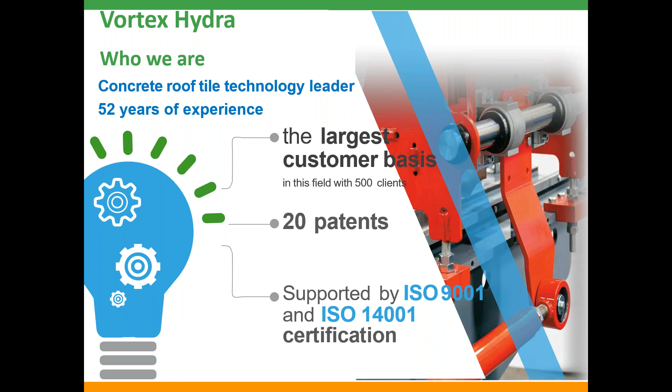Vortex Hydra has been selected as an industrial partner within the consortium of the RE4 project, and we have been tasked with the following goals. Goal 1: the maximization of the use of CDW-derived aggregates in lieu of virgin aggregates for the manufacturing of extruded concrete tiles. Goal 2: the investigation of potentially required modification or upgrade to standard equipment for industrial production scale.

Goal number 3, very practical, was the production of 60 square meters of extruded tiles to be delivered to the Madrid demo site, erected and handled by Acciona, another partner of the consortium, plus another 15 square meters to be delivered to the Matrix station in Benevento, South Italy, handled by another partner of the consortium, Stress.

At the beginning of the project at Vortex, we carried out a preliminary investigation about the possibility of using CDW-derived aggregate for manufacturing extruded roof tiles, since the manufacturing of automatic plants for extruded roof tiles represents the core business of Vortex Hydra. We carried out a series of trials, and because of the strict EU standards in force, both in terms of requirements for flexural strength and water tightness, described in standards EN 490 and 491, we were forced to limit the replacement rate of virgin aggregates with CDW-derived aggregate to 50%, which represented a lower limiting threshold within the project.

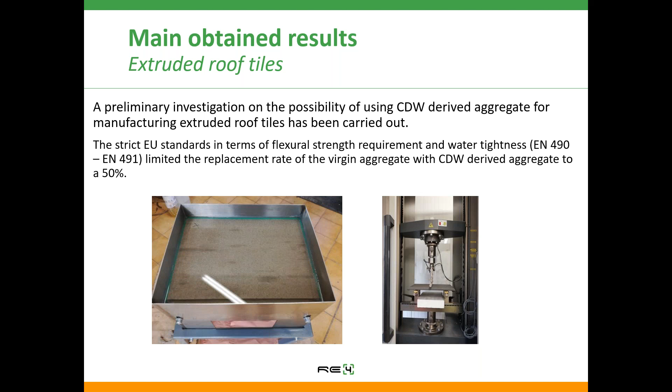On the right, we have a 3-point bending machine to test the flexural strength of the extruded roof tile. That percentage of replacement, set at 50%, was due to the fact that for the extrusion process, when we have to reach very high standards in terms of flexural strength and water tightness, we have to deal with a very well distributed Fuller curve, which represents the ideal grading distribution of aggregate size in order to get the most suitable density and highest flexural strength.

Then we focused our attention on extruded elements for facade cladding, addressing a product we were familiar with: an extruded tile which represents the base element of a patented cladding system for walls. This extruded tile, called Stone, has a dimension of 600 millimeters in length, a width of 100 millimeters, and a thickness of 10 millimeters.

The extruded tile, the Stone, is shaped so it can be easily hooked to a mounting rail system, represented by a series of metallic rails, vertical and horizontal, fixed directly to the substrate wall. This fixing system, thanks to a series of spacers with variable lengths, is ideal to realize ventilated or insulated facades, allowing insertion of insulating elements within the gap between the substrate wall and the facade finishing element. It is possible to get transmittance values responding to the standards in force in Europe.

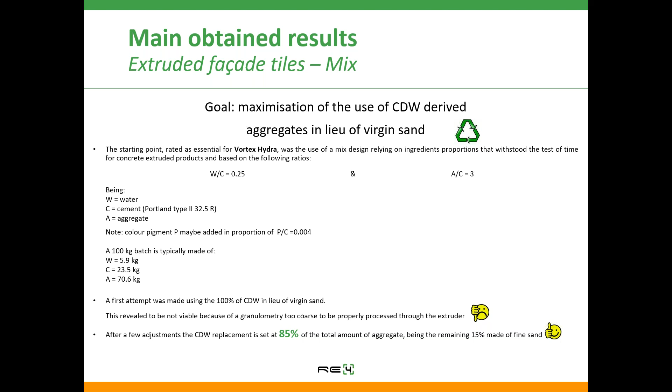It was very interesting, during the tests we carried out, using the experience developed over the years working in this field, to see that no upgrade or specific modification was required by the standard equipment to process the material with CDW aggregates. In an industrial scaled-up plant, we can have a batching plant usually working with a planetary mixer, because it grants the better homogeneity and better mixing.

Then the fresh concrete is conveyed to the extruder, where the extrusion takes place. Fresh concrete is put inside a hopper, and on the other side of the extruder, aluminum pallets feed the extruder. The fresh concrete, shaped in its final form, is conveyed via a system of conveyor belts inside a curing chamber.

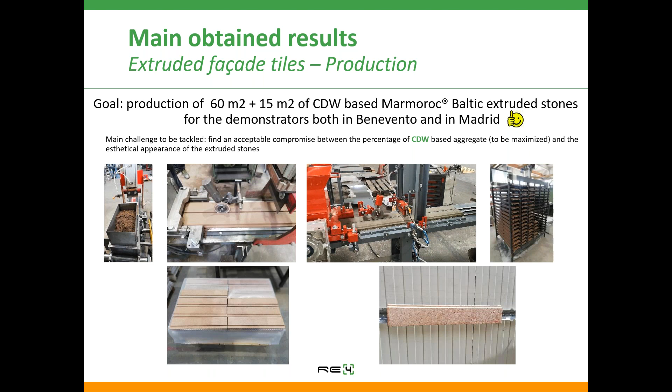Showing the action both of the longitudinal cutting blade and of the vertical cutting blade.

Elements produced have been delivered to the demo sites in Benevento. On the left side, a picture collected during the last January assembly, the metric station with a wall equipped with the extruded stone manufactured at Vortex. On the right side, an erection phase of the demo building in Spain, where prefabricated building manufactured with elements produced within the RE4 project will be put in comparison with a standard building.

Here you can see that extruded elements are ready for field test, because at the metric station the wall will be equipped with a series of probes and sensors in order to check the thermal performance of the wall, and also seismic tests will be performed on site. It will also be interesting to see the time for dismantling once the project comes to its final stage.

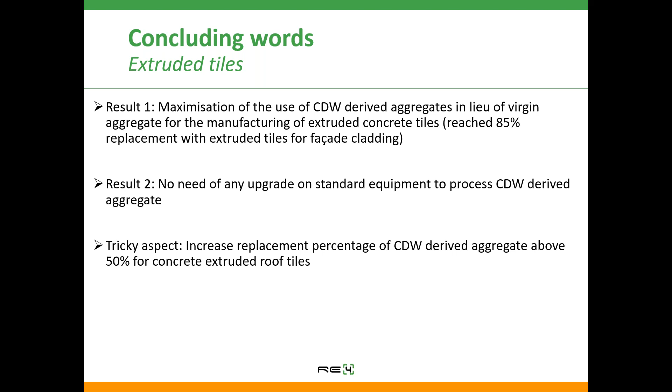As told before, the most tricky aspect was that concrete roof tiles imposed a quite low replacement rate, which was anyway within the minimum target that was one of the main goals within the project at the beginning in 2016. For me, that's all. I'm looking forward to receiving any question or curiosity which might have arisen meanwhile. Thank you, everybody.